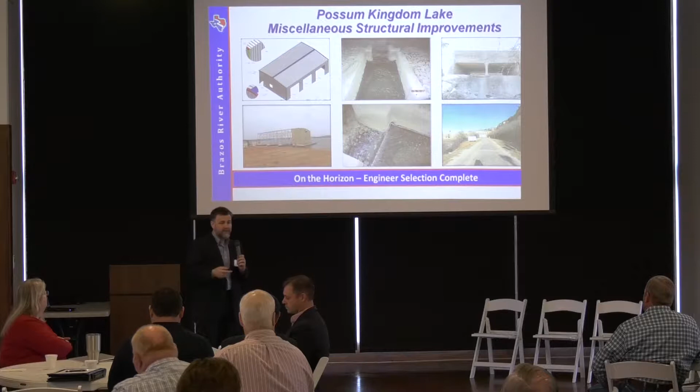This project is going to launch into a really detailed feasibility study, a pre-engineering report, pre-design, so that we can get all the permitting and planning mobilized for the detailed design phase and know which options we want to use going forward and keep the project on track. It's an exciting, significant project for us, and something we're looking forward to getting started here this summer.

Another project that we kicked off in February is called the CAASLE Project, which is a concrete assessment and service life extension for the Morris Sheppard Dam, which creates Possum Kingdom Lake. You'll see photos from the original construction of the dam, and then where it is today in time. We kicked this off in February.

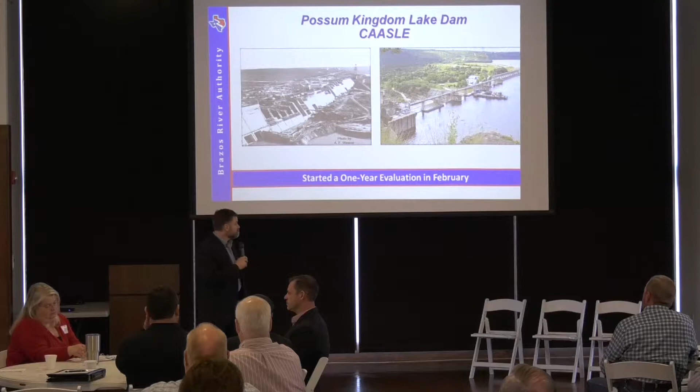As an engineer, it was probably one of the best days I've had at work in the last year, because we got to go crawl around the dam for the better part of the afternoon. And I will say that the dam, she's holding up pretty good for something that's 80 or so years old, but it definitely needs a little TLC. So over the next year, we're going to go through a detailed series of structural evaluations to determine what exactly we should do to extend the life of the dam.

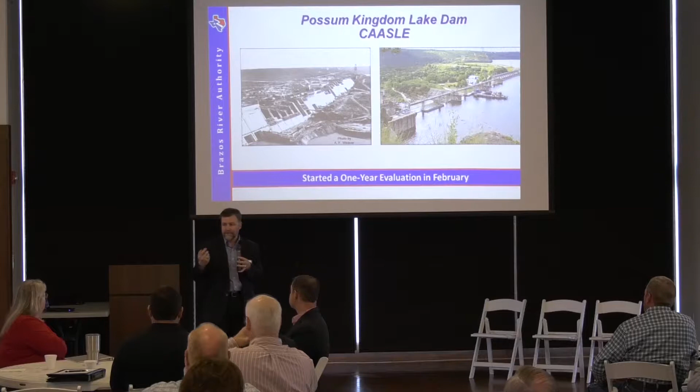And that's our primary objective, is to try to extend the life of the dam as long as we can. Then if we have to do other things, we'll be able to start getting recommendations out of that to do additional evaluations and engineering for this facility. Most concrete structures, we say about 100-year useful life. We want to try to get this one to go far beyond that as we possibly can, safely.

Another significant project we have underway is at Lake Limestone, and this is a replacement of the Tainter gates, or the radial gates as you may have called them, for Sterling C. Robinson Dam. This dam is 40 plus years old. The gates have leakage going on with them, so this is a full and complete replacement of the gates themselves. We're going to be looking at the hoist mechanisms as well to make sure they're able to handle the additional weight of the steel. We'll put in new hoists. So at the end of this process, we should have new gates for this dam. To give you a little perspective, each one of those radial gates is about 40 feet wide, so it's a pretty significant structure in and of itself.

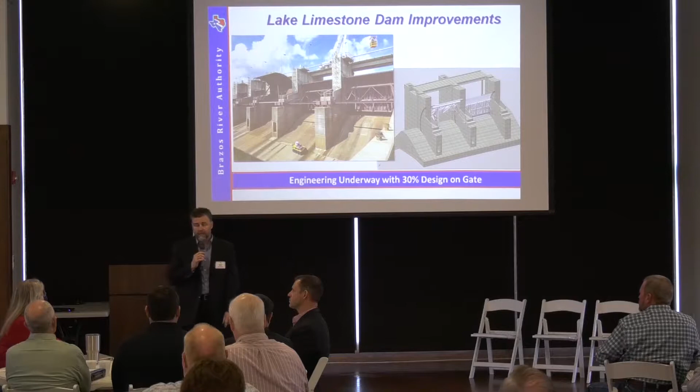We just completed 30% design on that. The engineers gave us their 30% submissions. We're reviewing that right now and should be able to move that into the next phase of detailed design this month.

Another project we have going on right now is something to help us extend our water portfolio. We are making use of the Trinity aquifer for additional groundwater supplement in the East Williamson County area. We have a water treatment plant in East Williamson County that treats Lake Granger surface water. This well is capable of producing about 3,000 acre-feet a year of water. The water definitely has a different quality than Lake Granger water, so we're going through an analysis right now. We're going to finish up the well so we can pump it and know for sure what water's coming out of it. Then we're going to do an analysis of the water and make sure we know what kind of blending rate we need to maintain stability of the water for the distribution system it goes into. This is a great opportunity for us to augment some of our water supply.

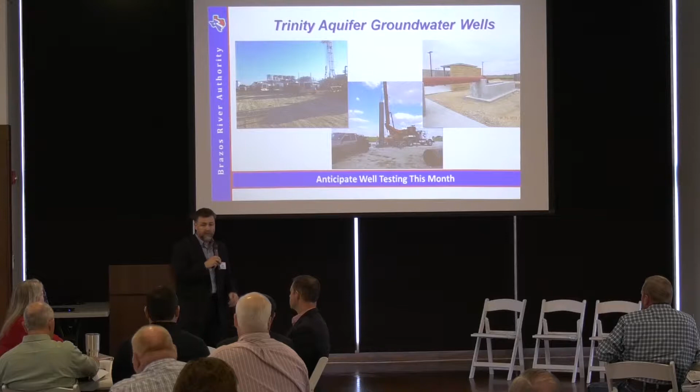Something we like to continue to look at is innovative opportunities down the road too. We should start testing with this well this month.

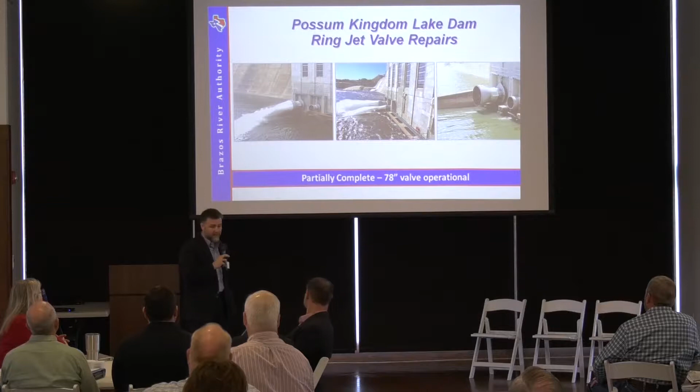Another project we've been working on, this is probably more of an operational project, but we have an incredible group of staff at Possum Kingdom that are great welders, great contractors, great builders, and they basically keep the Morris Sheppard Dam going. We've got these two valves, called ring jet valves. They give us the ability to discharge at lower flow rates than if we drop one of the gates. These are about 2,000 to 3,000 CFS. If we drop a gate, we go immediately to 9,000 CFS. So these have been problematic, to say the least, for a long time. Our team up there basically rebuilt them in place, got very creative about how they did things, and they got the 78-inch operational a couple months ago. They're actually working on the 42-inch right now, trying to get it operational this week. If you're up in the area when these are discharging, it's pretty awesome to watch because they shoot a very large jet of water out into the river downstream. This is a great accomplishment, something we want to make sure we noted - the team there is doing incredible work, keeping a very old structure running for us.

So any questions on the capital projects that you may want to ask, that I may be able to answer, or someone else may be able to?

I do want to make sure you understand, if you just read Texas Monthly, there's an article about the controversies over the Trinity groundwater. The Trinity aquifer is a very unique body of water. If you're west of I-35, it's a very shallow aquifer. It has very different characteristics than where we are looking at building groundwater wells in far east Williamson County. The wells they're talking about in Texas Monthly are less than 1,000 feet deep. Our well is about 3,200 feet deep, so we're real deep. Before we dug that well, we had extensive research done.

We actually dug a test well and hired groundwater experts to come in and prove through science that that well would produce and not have impacts on those wells on the west side of I-35.

So we're real excited about continuing to develop that well field. We think it will provide up to 15,000 acre-feet of water over time to allow us to bridge the gap to better understand the future of the Carrizo, or to permit Allen's Creek so we can bring Lake Somerville water or other water supplies to the west. We see it as a real affordable bridge to bring water to Williamson County and ultimately Bell County. We're very excited about that project.

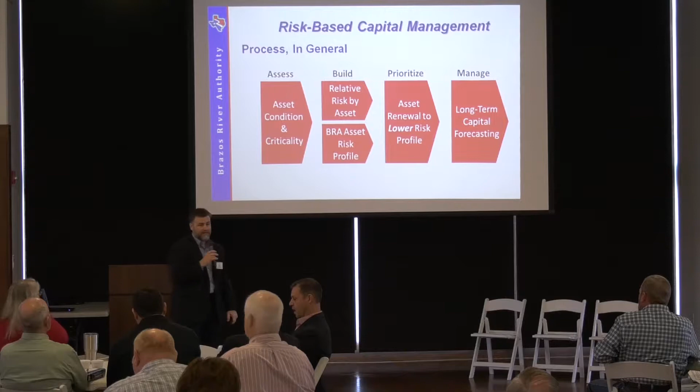The way we do this is we actually have different measures. One measure is likelihood of failure — think of it as probability. I don't like to use flood recurrence probabilities because we all know that data doesn't matter anymore. But think about the chance of having a fire at your own home — there's a likelihood of something like that happening. We have the ability, with good engineering review and science, to assess the likelihood that something may fail. That's the first piece, the probability.

And then we also want to look at the consequence if that were to fail. And because we don't typically build things without an extra unit, we'll include redundancy, because that is in fact an implied reduction of risk.

So if we need 3 pumps but we have 4 pumps, then we can account for that. And what it does is it gives us a risk score, and that risk score can give us a profile of where our assets are.

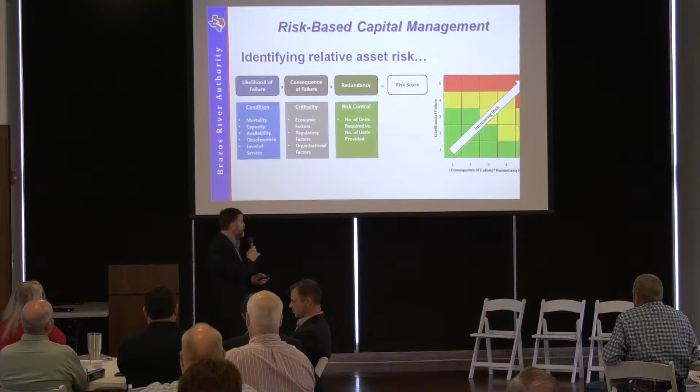So you can look at this and you would see different dots in different areas. Obviously, if they're in red, that's not good. If they're in green, it is good.

We actually did some of this back in 2011 when we were looking at some bond renewals and bond items. So for some of our facilities, we have an initial shot at this, and you'll see on a score of 25, I think the max this gets is like 12.5. So East Williamson County, most of our assets were in pretty good shape.

But if we were going to spend money on assets at East Williamson County in this case, we probably would want to spend them on the chemical handling. And in fact, that's what the staff did, is that they improved the chemical handling systems and they were able to help us with that risk profile.

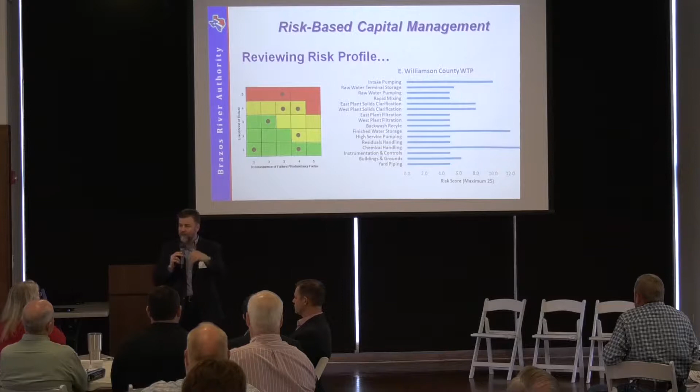So when I mentioned how we want to lower the profile, this is the kind of data we can use that will help us improve that.

A part of this that becomes a challenge is how you convert that data into something you can use. So we're going to have some different risk scores and different business rules that will help us move that data into how we set our capital improvement plans. So we'll use the risk score itself, we'll use the condition score, and then we'll use the rated useful life.

And if you're really interested in it, I'd be happy to give you guys my hour-and-a-half lecture on this slide at some point in the future. From that information, though, we can get different buckets of categories of spend, and then we can plot that information out, and then we can decide what we want to do with it.

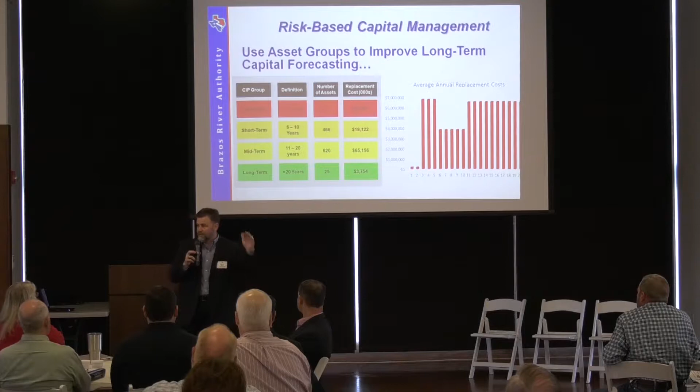So this is actually a real example I had from a prior life. And the first thing that we saw when we saw this data was, wow, is there some way we could move that here a little bit, or move some of this back here? And in fact, we made strategic business decisions to stop the peak and valley effect from hitting us.

So what are we going to do next? Over the remainder of this fiscal year, we're working to establish our hierarchy of our assets. This only works if you have your assets structured so that you can apply these factors to them correctly. We're going to map that into our Infor financial database.

The work is pretty much already done. We'll perform a gap analysis on our assets, make sure that we aren't missing assets that for this purpose we need, that we have captured in other places. And then make an initial assignment of that criticality data, so how important something is to us.

And then next year we'll work on the condition assessment data, and we'll finalize the criticality, and we'll start using this information to help us drive capital planning decisions. So it's a really exciting process. Like I said, it's a little bit wonky, but this is a really positive use of risk.

We often think about risk only in the liability term. This is really using it to help us make really smart decisions, and hopefully we'll do that going forward. So if there are questions, I can take them, otherwise I'll get back to David.

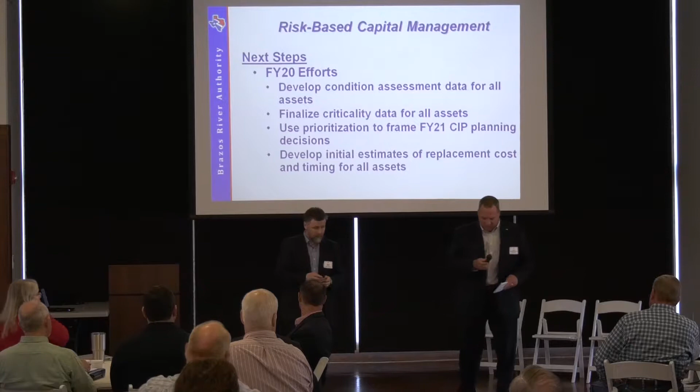So this is a real 30,000 foot view of the risk analysis that we're starting to do. And what's critical here is this allows us to justify why we're spending what money and when we're spending it to our board of directors and to our customers.

So when Chuck shows you and talks about all of the analysis that's going into this, we're actually looking at hundreds, if not almost 1,000 pieces of equipment at all of our facilities to understand how they play into this role. So there's a lot of development that's happening.

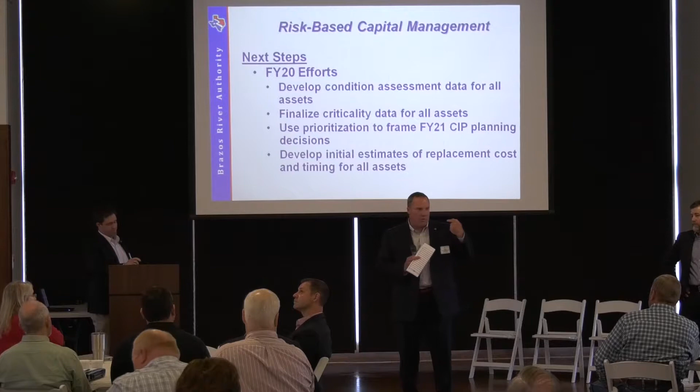So as you're having projects develop and you're trying to incorporate this into your system, you have resource issues that you have to balance. But I'm really, really excited that we're moving in this direction because it will help us be more accountable to you. It'll help us be more accountable to our board. It'll help us make sure that we don't get to failure on pumps or parts, that we can foresee in the future how to spend our money the best way that we possibly can.

So thank you, Chuck. I'll tell you a little story. My first meeting as general manager of the Brazos River Authority, I was so nervous that I actually introduced board members by the wrong name, even though I had it written down. So you'll understand when I tell you that when I folded this piece of paper, on the other side of it was one of our new board members who didn't get introduced. So Mr. Sanderson, Alan Sanderson, is a new board member for the Brazos River Authority, and we appreciate him being here. He's from Sugar Land, and at least when I introduced you, I got your name right.

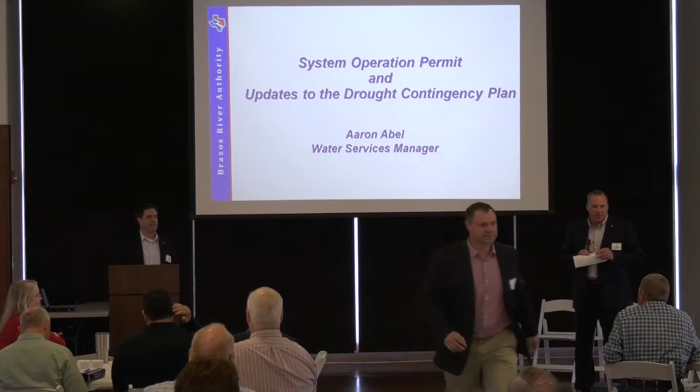Now we're going to let Aaron Abel, most of you know Aaron, he's our water services manager, talk a little bit about water supply and drought contingency. How's everybody doing today?

Under water supply, we wanted to bring a couple of items to update you on. One is the system operation permit and long-term contracting under the permit. We'll provide some background on how we got to where we are right now with the permit. We kicked off the project for system operations back in 2003, so there's been a lot of things that have happened. We'll also provide the next steps now that we have the permit and long-term contracts going forward.

And then finally, we'll talk about our drought contingency plan update - what the drought contingency plan is, how we're going to update it, and some of those changes. So we'll go ahead and get started.

This is kind of cut off a little bit. Looks like this slide here.

This is a schematic. First, I wanted to talk about the BRA water supply system. As most folks know, we have a system of reservoirs - 11 reservoirs, and 8 of them are not BRA owned. We have 3 along the main stem, and then 8 others on the tributaries. So the water supply system of the River Authority is large. You can go from here 4 hours north and you're still around PK, or you could drive downstream all the way to Freeport, and that's another 4 hours. So it's a large area.

We have a parallel system of reservoirs, and a large area downstream of the reservoirs that contribute to flows. Back in 1964, the Texas Water Rights Commission approved one of our older water rights called System Order, and they recognized that if you had coordinated releases, you could generate additional efficiencies of the system. You can see here how large the system is.

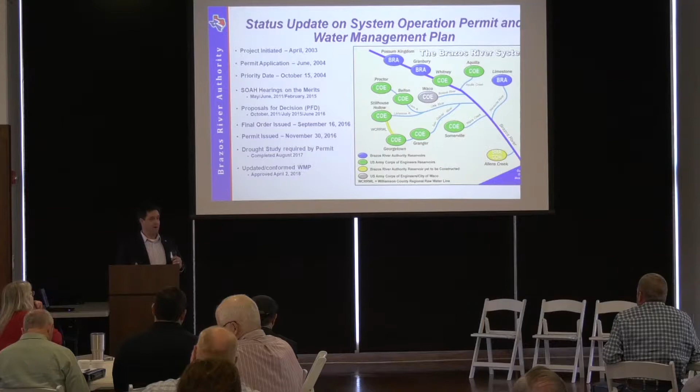Fast forward to 1997, there was no way to determine the benefits of system operation until Senate Bill 1 was passed, authorizing funding for the water availability models and the regional water plan. Taking the water availability models, we developed the system operation project, initiated back in April 2003. I won't go through all the different steps we've gone over the last 16 years, but it was a pretty long process. The big thing is we didn't have to construct anything - that's one of the big merits of the system operation permit.

We finally received issuance of the permit in November of 2016, and in that permit there was a drought study that had to be conducted to analyze the last drought from 2011 to 2015, to determine if there were any impacts to the system operation permit. That was completed in August 2017. Results of that study indicated no impacts to the system operation permit. Then finally, in April 2018, we updated the water management plan required for the permit, to conform with the actual permit issued in 2016.

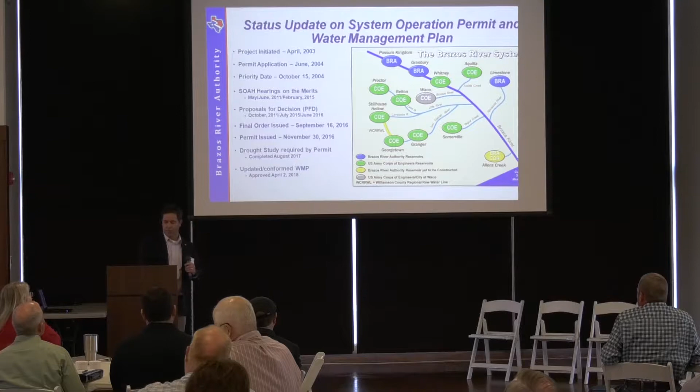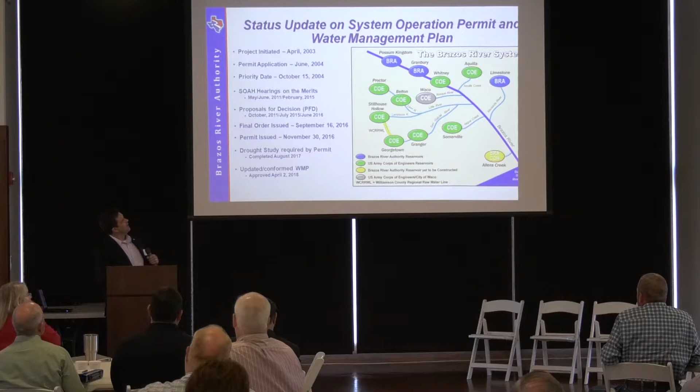So that's a little bit of the background. Jim Forte probably could have done this, he's run through this several times over the last 16 years or so, but we wanted to give you a background of the permit.

So the basic elements of the permit: it authorizes about 334,000 acre feet of non-firm water, and that's paper water, so that's not a firm amount. The firm supply is dependent upon some modeling that we've been doing for the last 14 or 15 months, and we'll talk about that shortly. But the permit itself authorizes use of return flows and unappropriated run-of-river flows downstream of our reservoirs.

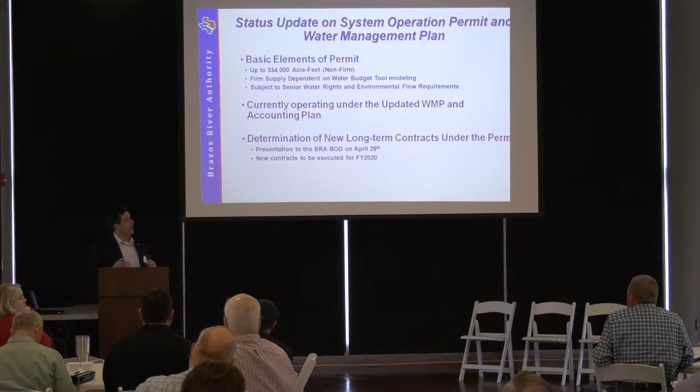We have gone through the water budget, we call it the water budget tool. It essentially takes the authorization of the permit and allows us to operate our system to determine where we can make contracts throughout the basin. So we're putting contracts where they are intended to be all up and down the basin and determine an amount. And that has aided us in doing that.

And we're going to go to the board next month, at the end of April, to make a presentation of these new long-term contracts under the permit. We expect to execute those contracts in the summertime for the FY 2020 budget.

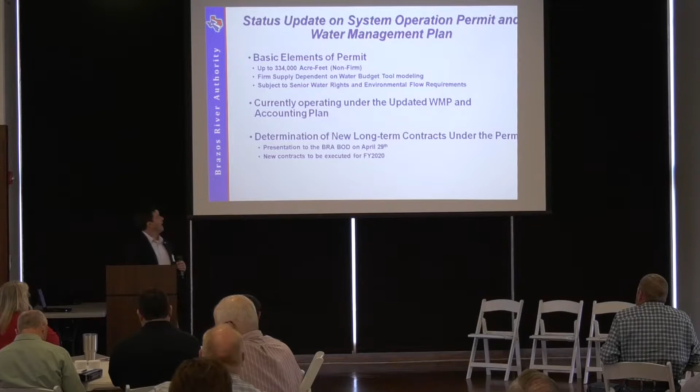I did want to point out that we are currently operating under the water management plan and the accounting plan, which for most of the finance folks, you got to count your dollars, you got to count your water too, and that's required by TCEQ, and we've been doing that since April of 2018.

So we'll change gears here now. Talk a little bit about our drought contingency plan update. So what is a drought contingency plan?

I guess that's probably some folks are wondering what that is. A lot of municipalities know what that is because you have to have your own plan, required by TCEQ. But essentially, we have to have a plan that as we enter drought, how do we make that supply last as long as possible?

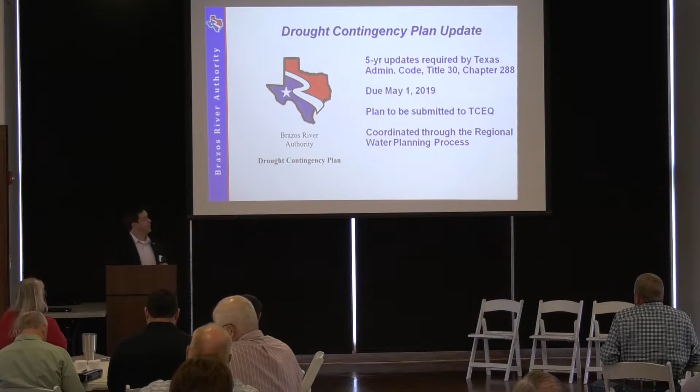So we have stages, and we can increase the measures as we get further along in a drought. But that's required by Texas Administrative Code, or TCEQ, to have 5-year updates to the plan. The plan is due May 1st of 2019. It'll be submitted to TCEQ. We do coordinate through the regional water planning process in the updates.

So the process, and we'll get into details of what changes we're going to have, but I wanted to bring this up: we do have a 30-day public comment period that begins tomorrow, actually, March 22nd. We'll have our draft posted to our BRA website at this location. We did send out letters earlier this week notifying of the process, and so you should either have already received that or should be getting that.

We did post this, the notice of the update. We got it into the Texas Register through the Secretary of State's office. We will address comments, and we're going to present the DCP update to the board for approval at the end of April, and then we'll submit the final plan.

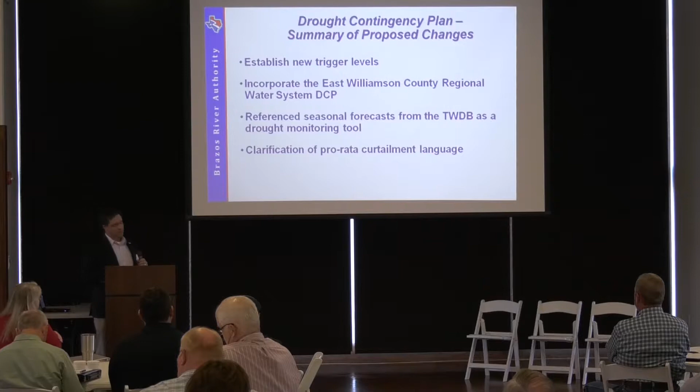So what are some of the proposed changes? We proposed several different things in this update of the plan. We are going to establish new trigger levels and some minor changes to the trigger levels, and I'll talk about that later. We incorporated the East Williamson County Regional Water System into the DCP. We have a water treatment system at Lake Granger that treats water out of Lake Granger, and so we incorporated that into this plan.

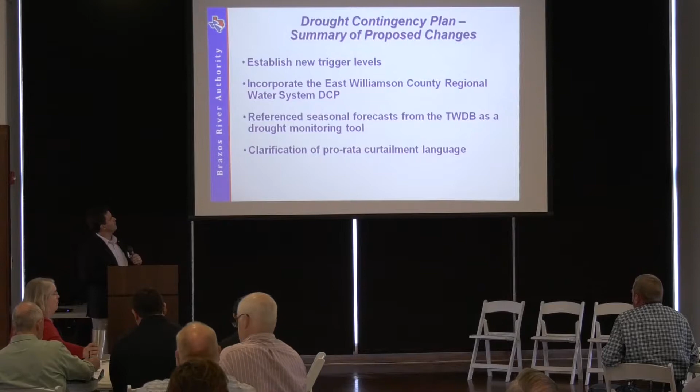And we referenced a seasonal forecast from the Texas Water Development Board as a drought monitoring tool. We worked with the Texas Water Development Board for the past several years on the seasonal forecast, and they've gained some recognition from the National Weather Service on their forecasts. We'll talk a little bit about that, but it is a good early drought warning tool to monitor as we get into the spring months. And then we clarified some pro-rata curtailment language in the plan as well.

So our trigger levels - these trigger levels, we have four trigger levels for each stage in our drought contingency plan: drought watch, drought warning, emergency, and curtailment. So those have remained the same. We didn't add any stages to the drought contingency plan at all.

As we enter different stages of drought, that's when we recommend it. Y'all receive notifications and letters, and we post it to the media as far as what our recommended use or recommended water use reduction will be in these different drought stages. And so the plan is consistent with the previous plan as far as those recommendations.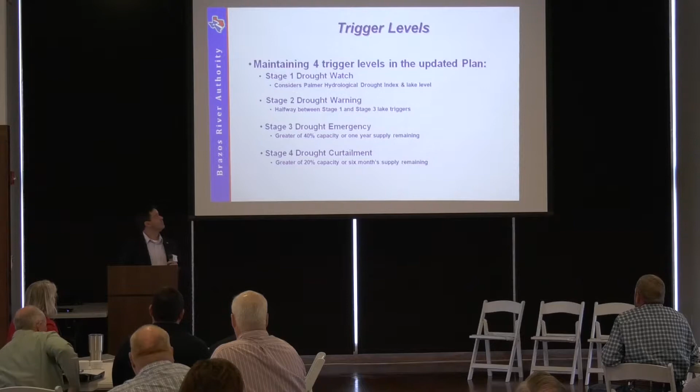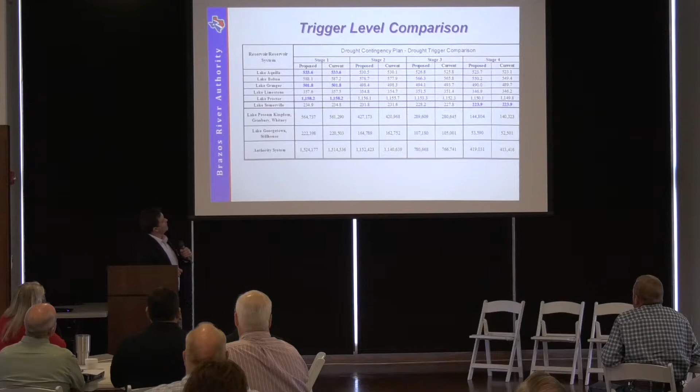A little bit about the trigger level: so as we enter these different stages of drought, we look at the lake levels at the individual reservoirs or the total storage, combined storage, and subsystems. So here, I don't know if the colors are kind of washed out in this, but we compare the current - what's in the current plan, the triggers - to the proposed. And you'll see several that are in bold blue; those are the areas for the levels that did not change. And you'll see minor modifications to the trigger levels in the other levels of the drought stage.

So I talked a little bit about incorporation of the East Williamson County Regional Water System. We did incorporate criteria specific to that plan based on initiation and termination of different drought stages. The triggers for initiation are based on consumption and production capacity in that specific plan. Going forward, we will maintain one plan that will be integrated into this overall drought contingency plan that we're delivering.

Texas Water Development Board seasonal forecast. This is something I mentioned before, that we work with the board mainly on data sharing, but the board got a grant funded through, I think, the U.S. Bureau of Reclamation to develop a forecast to determine the likelihood of above or below normal rainfall in May, June, July.

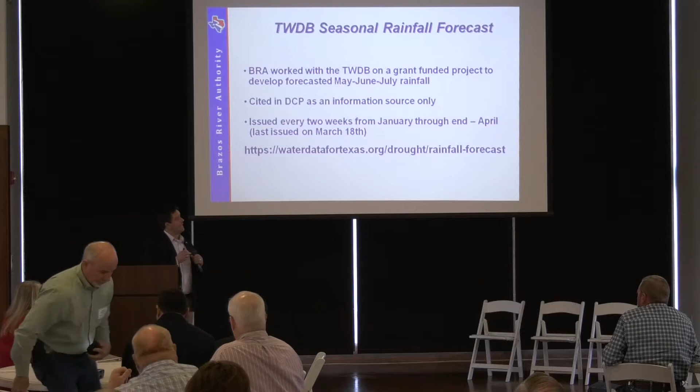As everybody knows, if we get to April and May and we haven't had any rain, we're probably in a drought or about to be in one. So it's critical for that time frame to know what's going on. As I mentioned, the board has attended some meetings and gained recognition from the National Weather Service for how they predict the May, June, July rainfall. What they do is take the atmospheric stability and atmospheric circulations in January through April to forecast what they think will happen in May through July. They're also working on other rainfall forecasts for other parts of the year that would help us determine what the drought might look like, or if there's a possibility for one.

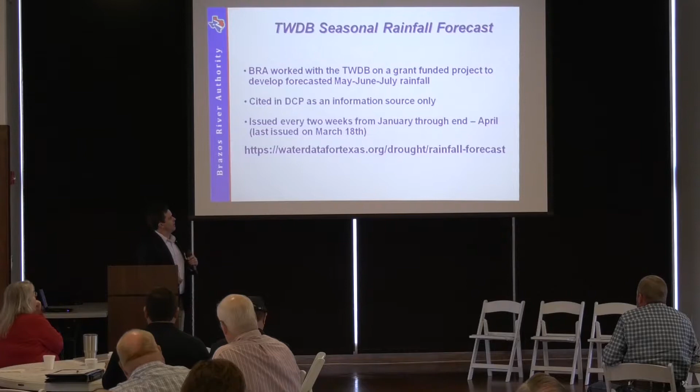It's issued every two weeks from January through the end of April. If you go to this website, you'll find it's a county by county forecast, but we wanted to cite that in the DCP as information—it's a tool you can monitor for the likelihood of a possible drought coming up. So I think that's all I have.

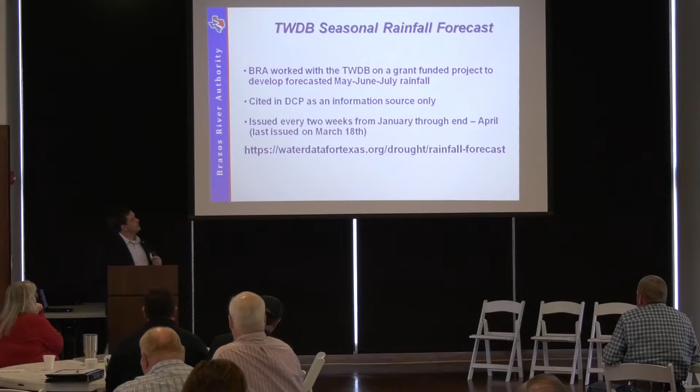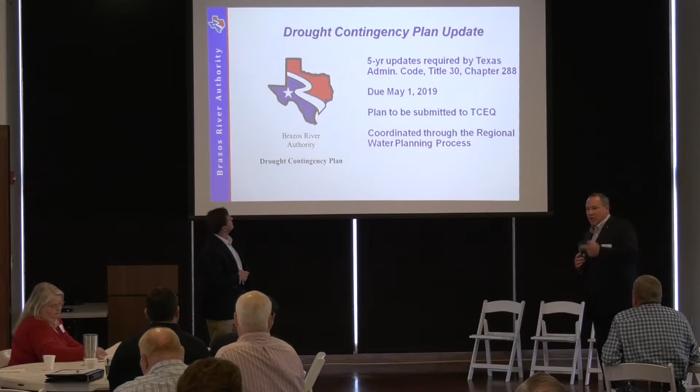Go back to your slides. A couple of things—if you need help with your DCPs, let us know, we'll come sit down with you. All of this stuff is going to be posted on our webpage. We'll also be talking about DCPs this summer at the special meeting. But I want to drive home a point.

For those of you that were looking at this number, Aaron, in 30 words or less, give a definition of firm water. So, 30 words... 33 words.

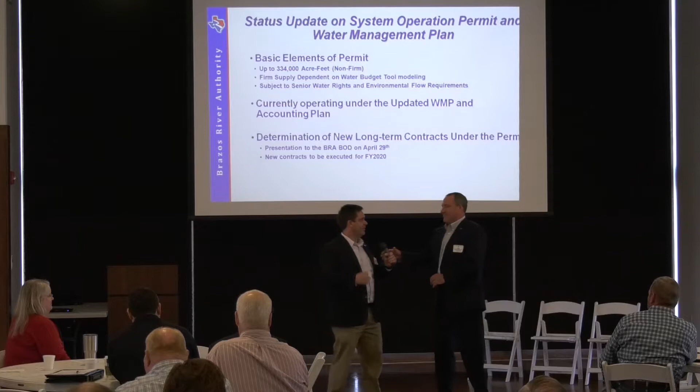So looking at the water availability models, don't count them—you're modeling evaporation, inflows, water use through the worst drought on record on a month-to-month basis. That minimum amount of water you can achieve through that drought of record is firm yield. That's close enough. Firm yield is all we will contract for on a long-term basis, because we don't want to overcommit water and have customers go pour concrete and start building infrastructure, and then figure out the water's not firm. So when we contract with you all for long-term water supply, 30 years or beyond, it's firm yield.

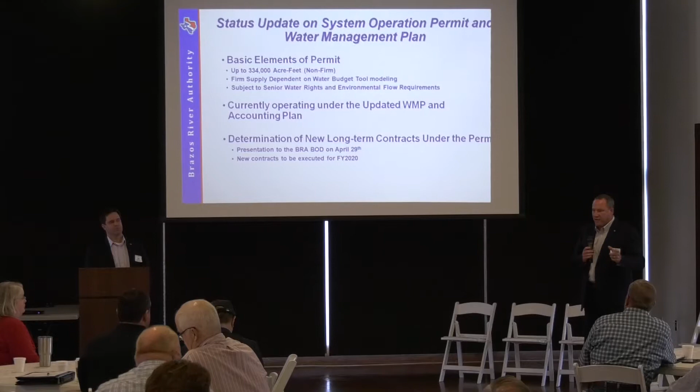The firm yield out of SysOps is nowhere near 334,000 acre feet, and that's what this model these folks are working on will firm up—it will shore up that firm water amount. It's going to be somewhere closer to 100,000 acre feet of water, correct? So that's what we're looking at. We're being very cautious, again, because the last thing we want to do is make water available that we then figure out is not available. So Tiffany Morgan's going to come up now and talk a little bit about some of the really challenging things we're dealing with as far as trying to both protect the environment and protect our water supply.

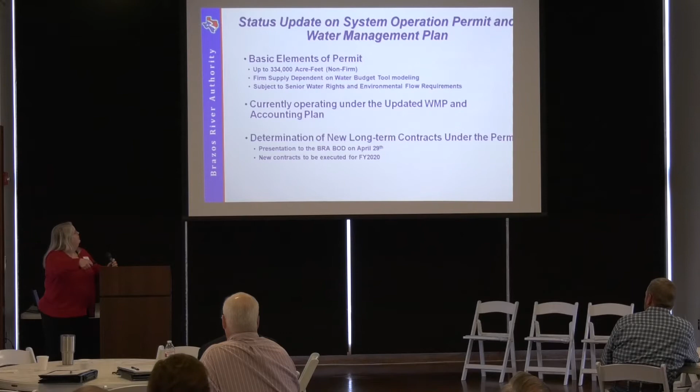For those of you who've attended meetings for the last couple of years, you've heard me... sorry, no, you're going the wrong way... you've heard me talk about a concern we've had for freshwater mussels in our basin.

Fortunately, we do have a little good news on this front. The false spike and the fawnsfoot, as U.S. Fish and Wildlife has worked through their evaluation process, those are probably truly on the path to being endangered. I would fully expect that to be their recommendation this fall. There are very small populations, isolated to just a few river basins in Texas, and they basically check all the boxes.

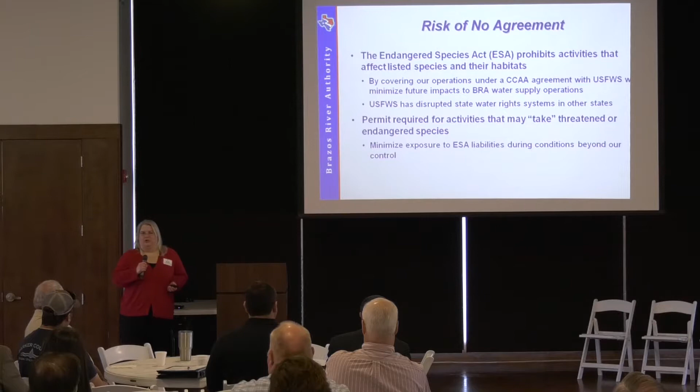And the biggest risk, which I already said, is that they can come in. California -- they have dramatically impeded their state water rights systems. In some areas they have, through court order, disrupted the system to the tune of 800,000 acre-feet that can no longer be diverted for municipal, agricultural, or industrial use. That's more than our current total permitted amount of water, so it can be quite dramatic, and they do have the authority. I can only think of one or two cases where the Endangered Species Act and Fish and Wildlife has not won a court challenge. It is just that strong of legislation.

So where we are right now is we have submitted to the Fish and Wildlife field offices -- we have 3 field offices that cover our basin -- our proposed CCAA agreement. We have received comments back on them. I was pleasantly surprised, a few issues to work through, but nothing totally unreasonable or that far out of line. They seem very receptive to our comments back. I hope to have a revised draft back to their field offices hopefully by the end of the month. Then if they approve, we can submit it to the regional office for approval in Albuquerque. So hopefully by the time we meet again, I'll be telling you we have a done deal and a permit, and that our water supply is protected for y'all's benefit for the future.

So Brad Brunett, our Central Basin, Lower Basin manager, is going to talk about a whole broad spectrum. Hopefully not too broad, because lunch is coming up here pretty quick.

I've got 4 projects I want to update you guys on. If you've been to our customer meetings in the past, you've probably heard us talk about these. If not, I'll give you an update on them today. You'll learn a little bit about what we're talking about.

First off, we've been working on a couple of reallocation studies with the Corps of Engineers over the last probably 10 to 15 years in total. We've got one of those that's at the tail end of the process, and another one that's just getting toward the start. Lake Aquilla is one that we've been working on for quite a while, and it's at the tail end, and Lake Whitney is one that we're getting ready to start on.

I'll talk a little more specifically about them on the next couple of slides, but when we say reallocation, we're basically talking about how to use the different storage zones in those reservoirs differently in the future than we have in the past. And when I say differently, I'm mainly talking about getting more of a water supply benefit out of them.

Most of the Corps of Engineers reservoirs, you saw the map earlier, in fact, all of them have a very large flood pool where when we have a lot of wet rain and runoff like we've had the last several years, the Corps of Engineers captures and holds that water in those flood pools until it's safe to release it downstream. Those flood pools serve a very important purpose of minimizing flooding downstream, but on the flip side of that, the area below the flood pool and the normal pool, or what they call a conservation pool, is for water supply. As we all know, our populations are increasing in Texas and our water needs are increasing. So what we're basically looking at is seeing if we can take a little bit of that storage, at least at Lake Aquilla, that's been reserved for flood storage in the past, and use it for water supply.

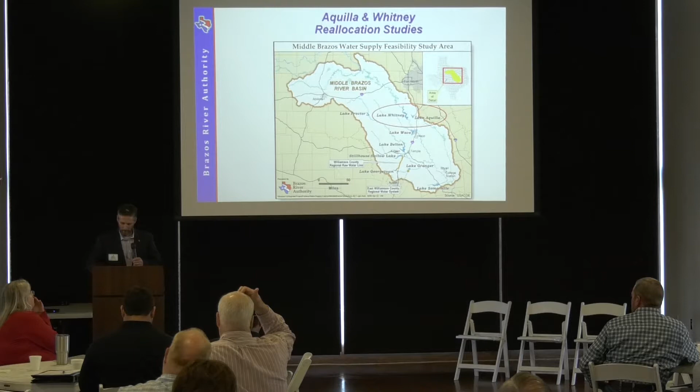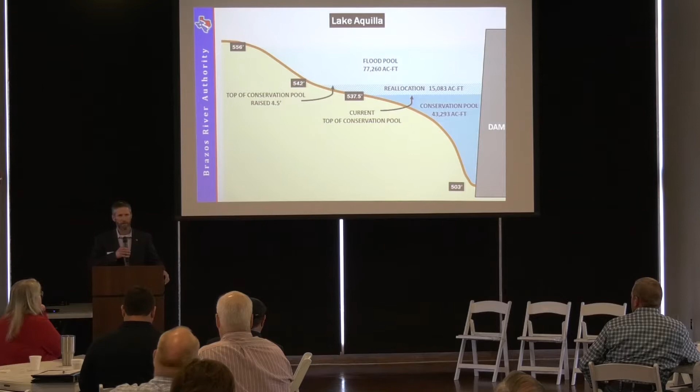So we started working with the Corps about 10 years ago to look at reallocating a portion of that flood storage down to water supply. You can see there that what came out of that study was we looked at a number of about 15,000 acre feet of additional water that you see there in that hashed area between elevation 537.5 and 542. So that was kind of the recommendation coming out of that study, that we would increase the pool level there at Aquilla, the normal water level, by about 4.5 feet and add some water supply to our system.

We completed that study about a year ago, and it was primarily funded 50/50 by the BRA and by the Corps of Engineers. The Corps of Engineers staff did most of the work, and we helped fund that. We've been in the Corps of Engineers approval process for the last year or two, and they have a fairly meticulous process for getting these things authorized. It starts at the district office level, then goes to their division, and ultimately up to headquarters, and then finally to the Assistant Secretary of the Army.

And unfortunately, with this project, we heard about 2 weeks ago that the Assistant Secretary of the Army for the Corps has denied authorizing this project to move forward. We heard that verbally from the Corps of Engineers, my friends at the Fort Worth District Office, but we haven't received the official written confirmation of that.

So we're expecting to know a little bit more about what that means and what options there are to move forward here shortly. And in the Assistant Secretary's defense, obviously water supply is important, and we're supportive of this project and wanted the ability to implement this in the future if we need to.

But with all the flooding that we've had in Texas over the last few years and across the nation, it's our understanding that the new Assistant Secretary, who's been in place maybe a year or so, is just really risk averse to giving up any flood storage right now, because of all the flood problems we've seen. If any of you have been living in Texas, especially down around the coast, we've had some major floods. So we're going to have to stay tuned on this one to see how it plays out. But the last news that we got was not good in terms of a path forward.

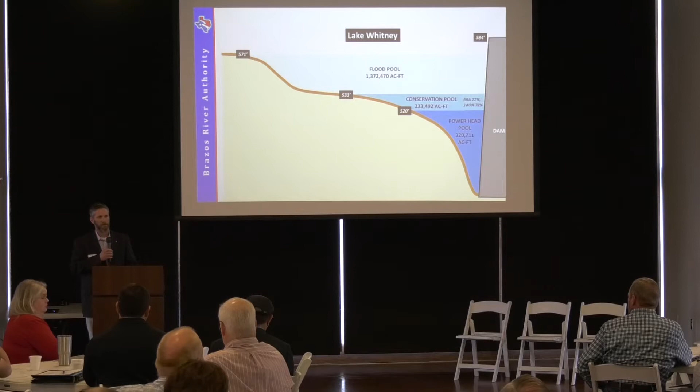So it's going to be a multi-year process, and hopefully at the end of it, we'll have some additional water supply, and we'll be able to make peace with the power company and compensate them for any water and storage that they have to give up.

Allens Creek Reservoir, this is another one. If you've been to our customer meetings, y'all have heard us talk about this every year, probably as long as we've been having customer meetings. So just a quick update.

There we go. They told me not to touch it on the bottom, and I did.

So this is the proposed reservoir in the lower Brazos Basin. It would be built just off of the Brazos River, and it's a unique reservoir in that it's not going to dam up the Brazos River or any major tributary. It's going to be built right off the river, and will actually pump water from the Brazos River into the reservoir when flows are high or normal in the lower Brazos, and then we'll have that water sitting in the reservoir for when we have droughts to be able to provide to our customers in the lower Brazos Basin.

So it's called a scalping operation. We'll be pumping that water from the river into the reservoir. The water right permit for this project is already in place, so we have that. We also have all of the land secured. 99% of the land is owned by the Brazos River Authority and our project partner, the City of Houston.

The legislature kind of created the current ownership arrangement 20 years ago or so, and the City of Houston owns essentially 70% of this reservoir when it's built, and the BRA owns 30%. So that means they pay for 70% of it, get 70% of the water, we pay for the other 30% of the water. The problem has been that in our basin, we needed this reservoir really yesterday. We're already behind in our mind, and we're trying to move it forward. The City of Houston has adequate water supplies for a long time in the future, and it's debatable whether they need any of this water at all. And so we haven't been able to reach a good negotiated settlement with them to be able to either move forward under the current arrangement or else essentially buy them out of the project.

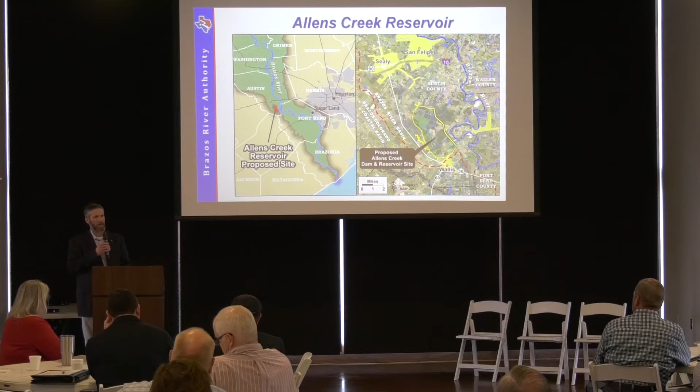We've got probably 5 to 10 years of 404 permitting to do with the Corps of Engineers. We still have to do the engineering design and then construct it. So if we're being honest with ourselves in terms of a time frame, we're probably looking at 10 to 15 years before we can get this thing online, and we need it as quick as we can. And price-wise, it's about half a billion dollars, $500 million is our estimate for the project from where we are now to getting it completed.

The last thing I've got here is the Lower Brazos Flood Protection Planning Study. This is an effort we began back in 2014, actually at the tail end of the drought. I remember when we were talking about getting the study going, there were comments made about whether we really should be doing this, do we need to do this, because at that time nobody knew if it was ever going to rain again, much less flood.

But lo and behold, we started, and here we are 5 years later, we've had historic flooding in this part of the basin. So the purpose of the study was really to update and develop consistent floodplain information from about Hempstead down to the coast. So that's about 200 miles of river down there, where we either had no floodplain information or very outdated information, or disjointed information from one county to the next.

And so we were looking to update that entire stretch of river so that we've got new, updated, consolidated data and floodplain information. BRA kind of coordinated that study. We had a number of partners in the Lower Brazos Basin, some of them are probably here today, that helped fund it. We also received grant funding from the Texas Water Development Board. So it was really a collaborative effort that's turned out to be, in my opinion, kind of a showcase for what regional floodplain planning should look like in Texas.

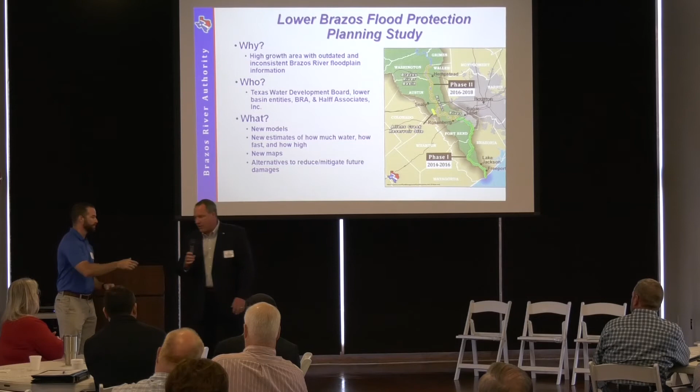Yeah, I'll talk a little bit more. A lot of you attended our board meetings, which we'll have one at the end of April, where you can watch on the YouTube live feed. At the April meeting, I'll give a much more in-depth legislative update that gets into a lot of the different bills that are moving, a bunch of different subjects. So I won't go into that level of detail today.

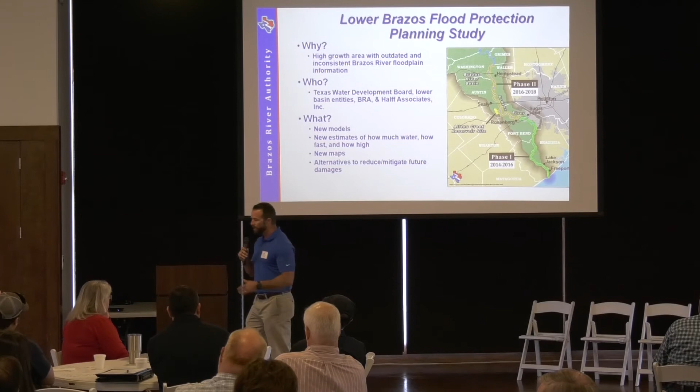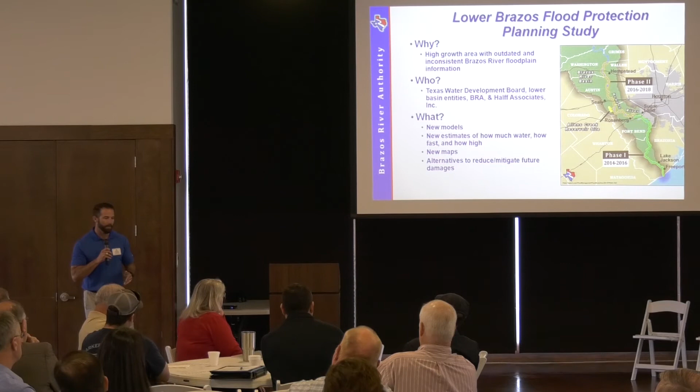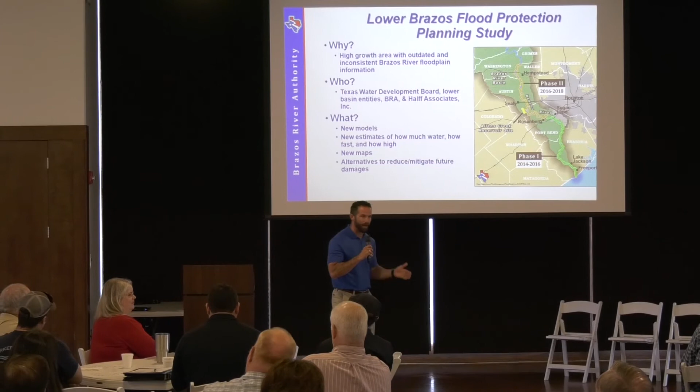What I will say is the legislature, as it relates to water, is spending a lot of time on flooding, which we all expected coming out of Hurricane Harvey. It was kind of funny, at the beginning of session before the filing deadline, it almost seemed as if every member of the legislature, no matter where they were from, had a flood-related bill. They were getting filed left and right. Some of them were good, some of them were not so good. But we're now to the point where a handful of those bills have kind of risen to the top.

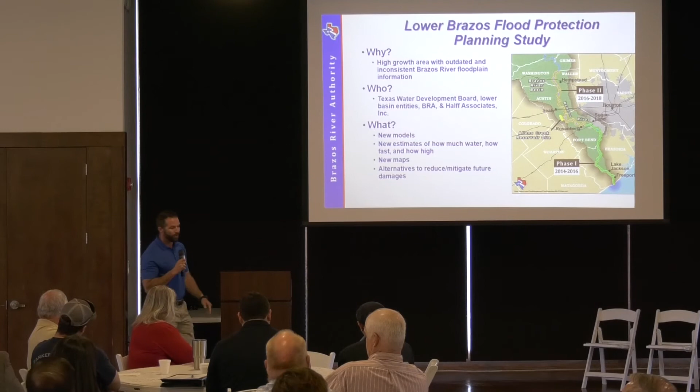There's about four of them. The Senate passed three of them yesterday, and the House passed one of them out of committee on Monday. Essentially, what they all do is, in addition to providing funding for things such as mapping and planning, which is something I think the legislature is going to put a big emphasis on, they look at creating a statewide flood planning process similar to the regional water planning process, which a lot of folks are familiar with, when you break the state up into individual watersheds and basins and look at flood projects in those.

They also look at creating a flood infrastructure fund, which would fund projects that come out of that plan, in addition to funding recovery from Hurricane Harvey. So essentially fixing what's broken, and then looking at ways to build projects that would mitigate flooding in the future. And then they also look at disaster preparedness.

How do you train local officials to be better prepared for a disaster? How do you deal with things like debris removal? Debris removal was something we were very concerned about going into the legislative session because we were worried, given the amount of river stretch that we have, that we would be given the responsibility of removing debris out of every stretch of the Brazos River and all its tributaries. That sounds expensive, and it sounds like something we probably don't have the manpower or the authority to really do. Luckily, none of that has come out of any of this. It's really been more to study the issue, figure out ways to provide local entities with funding from the state to be able to remove debris, so that's a good thing.

What we also haven't seen come out of the flooding discussion is, as David mentioned, changes to reservoir operations. We were really, really concerned about that going into the session - bills requiring us to do things like pre-release water from our reservoirs in advance of weather forecasts or hurricanes, so we would artificially lower the lakes and potentially either lose all that water supply if the rain didn't come, or potentially make flooding worse if the rain happened below the reservoir instead of upstream. Luckily none of that's happening. It all seems to be moving on a relatively good track, at least for now.

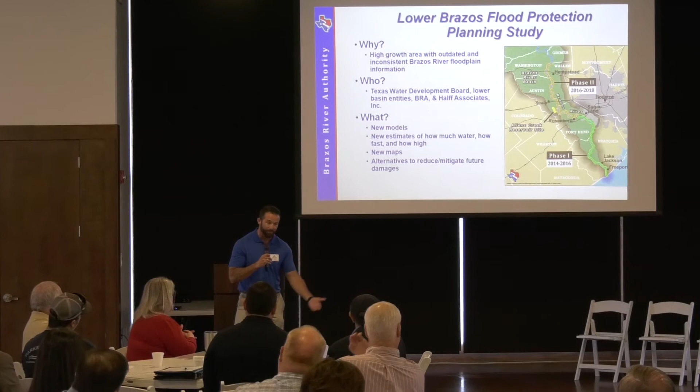And for Houston, it's really a good news story for them. The reason they're not interested is they have taken care of their water supply future by going to the Trinity Basin, and that's great, that's awesome for them. But what that means is they don't need this project, and they certainly don't need to spend upwards of $300 million to construct a water supply project that they don't need.

So that's what we've been attempting to convince them of - look, let us take this on for you. Let us buy you out. Let us build it. We can reserve some water for you in the future, a smaller portion of water in the reservoir that you can then buy from us. And we were making progress with that for a while, leading up to the beginning of the session, and then it just kind of hit a brick wall and stopped.

And so that's why a group of interest in our lower basin, with our support, went and got the bill filed. The bill basically does two things. It requires Houston to accept the buyout from us by January of next year. And it requires us to reserve a small portion of water in the reservoir for them to buy from us in the future. So even with us taking over 100% of the project, they still get water out of it. Now, water they don't really need, but they still get something out of it.

Two things happened when the bill got filed. Houston immediately opposed it, which we were not surprised by, and then they suddenly found an interest in moving the Allens Creek Reservoir project forward. They sent us a letter saying, we are ready to go, we don't know what's taking you, BRA, so long to get things going - which is hilarious to even hear. And so you can imagine how we were doubtful of their newfound interest in this project. It's just awfully coincidental that they suddenly became interested in moving it forward when a bill got filed forcing them to sell it to us.

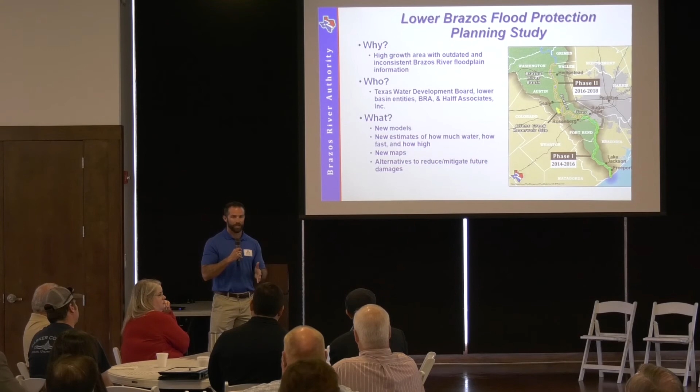I'll finish by saying this: success doesn't necessarily mean that a bill passes. Success can mean us coming to a deal without the need of that bill passing, allowing us to move the project forward. So if the bill doesn't pass, but it keeps us talking and gets things going, that's fine as well. But we need something to happen before the end of this session that gives us certainty this project's going to move forward.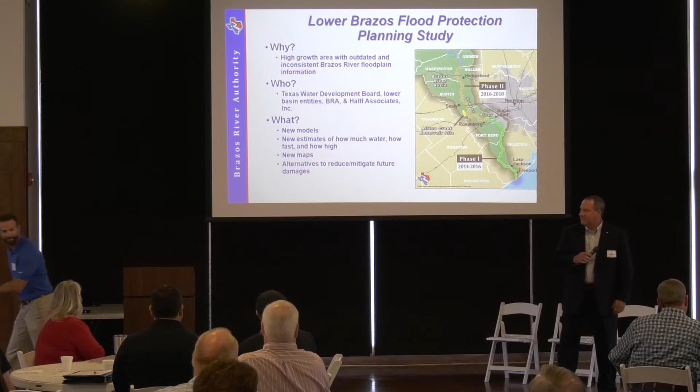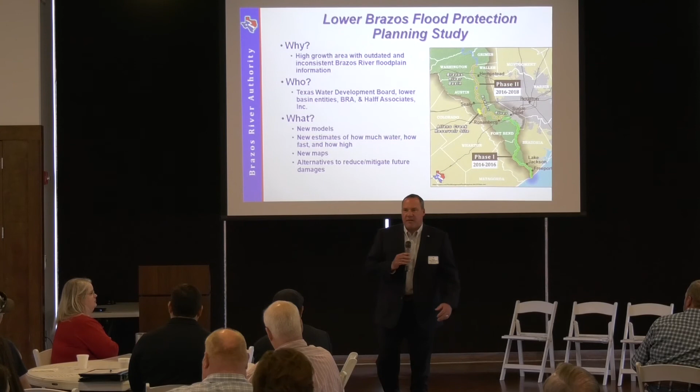How many acre feet is that Allen's Creek going to hold? About 100,000 acre feet would be the firm yield of Allen's Creek. And is it going to be deep water or shallow? Maximum depth, you're looking at about 45 feet. Of course it hasn't been engineered yet, but preliminary looks, that's about it. So the water level would fluctuate greatly because it would be primarily a water supply reservoir.

Okay, but then for something like Dow Chemical stuff, it makes a lot more sense to have reservoirs like that. So glad they're building that, rather than trying to send it downstream with all the evaporation and saturation losses. It makes sense to develop that water supply further down south. And it provides drought protection for our other reservoirs and allows us to keep other water supplies where they are, for long-term drought protection and for future water supply. So we're excited about it moving forward.

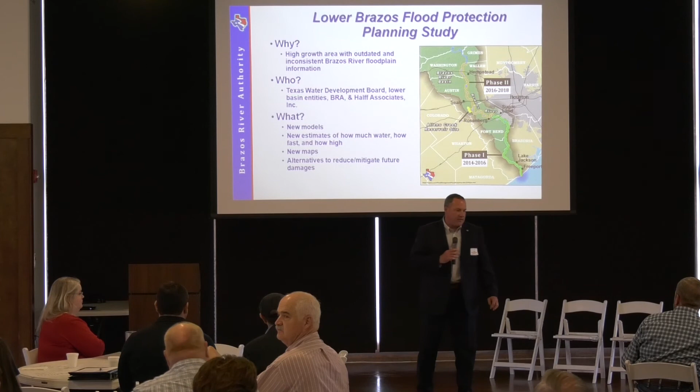I think, again, it's a roller coaster. Every day's a different story. We'll see where it goes, but we're excited that we're getting some traction and moving forward. Any more questions about anything that you've seen or you didn't see, real quick? Yeah, Jim?

It's kind of a question in the state. On the system operation permit, when you first started that, the BRA, I think you might have still been in school. Phil was, he still smelled like jet fuel whenever he walked into the office. 16 years, somebody has to go down there and say these types of things and these types of processes should not take 16 years to go through. With the pressure that we all have to provide resources for the growth of the state and keep up with what's going on, 16 years is just absolutely, do a 360 on this. We're going to list endangered species, like Tiffany said, faster than we're going to be able to get through this process of just getting a permit. It's just, to me, unbelievable that it took that long to go through the process, and I'm sort of ashamed that we're all supposed to be working together in moving this forward. We all ultimately knew we would get here, but 16 years, I think everybody just needs to share that that's too long.

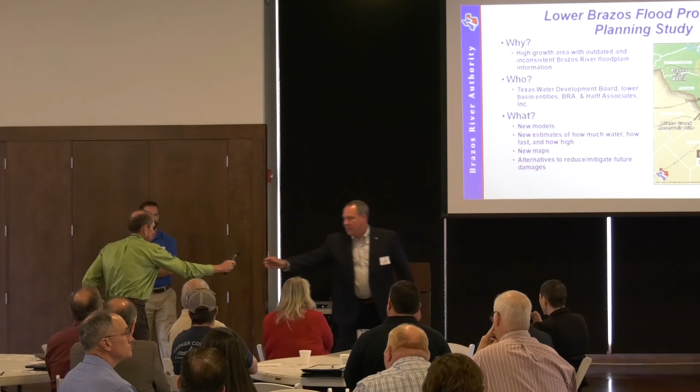Jim, I really appreciate that comment. A year ago, we started making our rounds both in DC and in Austin, and the legislators asked us what can we do to help you? This was the exact same conversation that we had with them.

When we're developing water supplies, we can't get tied up for 16 years. So if Houston comes in tomorrow and says, okay BRA, you can move Allen's Creek forward, we're going to start 404 permitting, and success will be measured on if we can get that permitted in 5 years. It's probably more like 7 years. The data will have to be submitted to them in 2 years. So we're going to work in limbo, if you will, for 5 to 7 years to figure out if the reservoir can be permitted. Meantime, there's all this growth along the Texas coast, throughout the entire Brazos Basin. It's going to be aided by that water, but the whole permitting process, just as Jim alluded to, is just going to take a long time.

Do you have anything you wanted to add to that? We could not agree with you more, that permit took way too long. When we visited with elected officials at the state level about it, what we've told them is you created all this money to implement state water plan projects, but none of that money matters if you can't get a permit for the project to begin with.

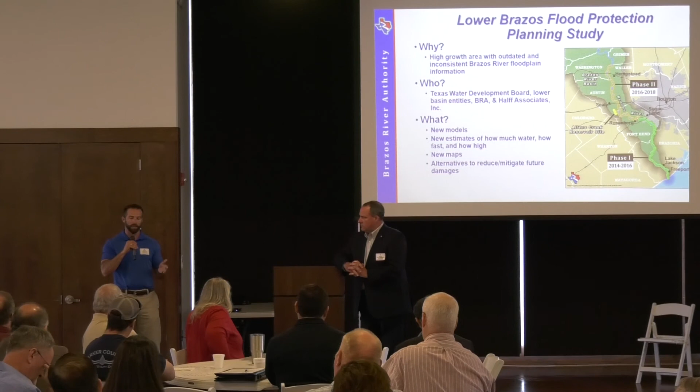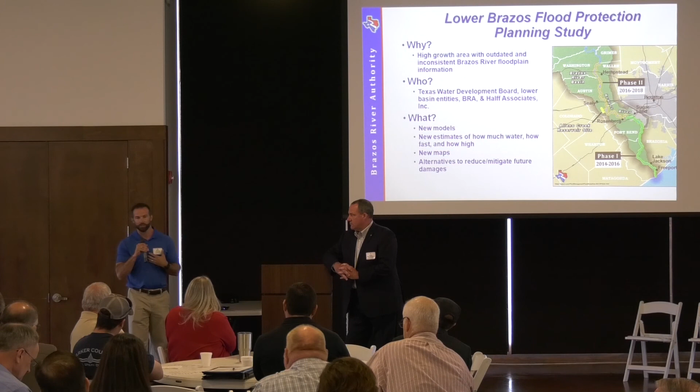The Senate Ag and Water Committee, over the course of the interim, looked at permit streamlining. We actually went and testified and said that the system operations permit is the poster child for why permitting should be streamlined, should be made faster. And the direction of TCEQ from that committee is you've got to figure out a way to begin getting permits out the door faster, or we, the legislature, are going to figure it out for you. So I think there's an effort. We'll see how quickly they can do it.

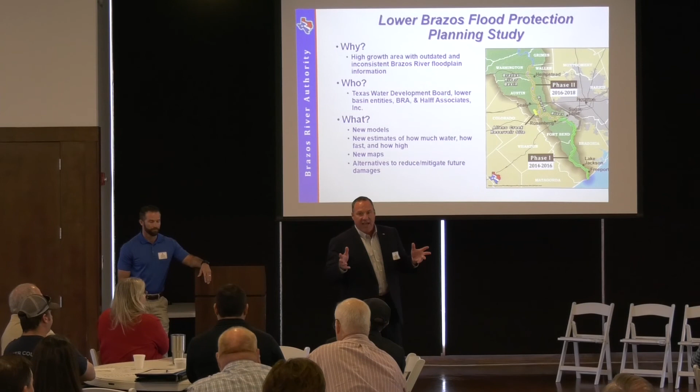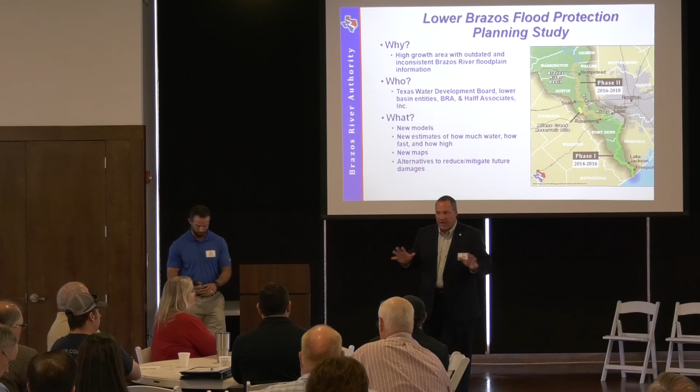Understand that with water permitting, when our permit was being considered, if you all had permits in line, you had to wait for us to get done. So if you submitted a permit 2 or 3 years ago, it waited for our system operations permit to move forward. So there was a train wreck there that had to be cleared out. Thank you for that comment, Jim.

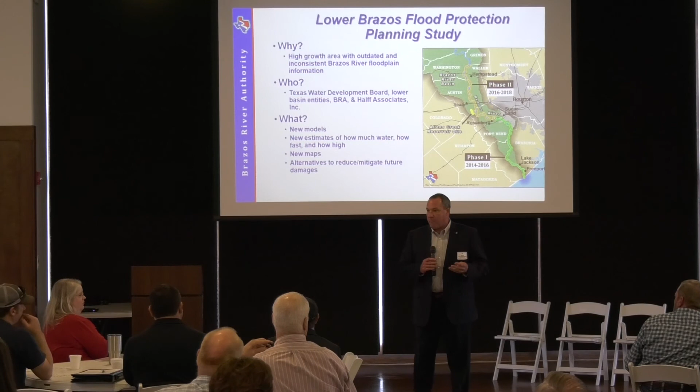So let's talk about going forward a little bit. Our staff is going to spend the next 30 days finalizing our budget. We will present a draft budget to our board of directors at the end of April, and then immediately turn around and start scheduling our customer meetings to talk about the budget. We'll do them just like we've done in the past. We'll have 3 meetings in 3 days. We'll have them regionally, so you won't have to travel as much.

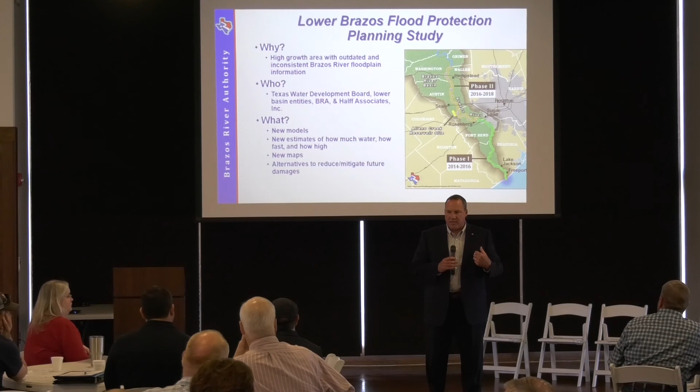The one change that we're going to do is try to move that meeting from the middle of July to somewhere early in June. We wanted to move it even earlier, but the legislative session this year is just not going to allow us to do that. The reason we're going to do that is so you'll have more time to look at our budget, work through any issues or challenges, or if you wanted to approach our board about issues you had with our budget. So we're trying to allow you more time to review it instead of just showing it to you in July and having our board consider that budget 2 weeks later.